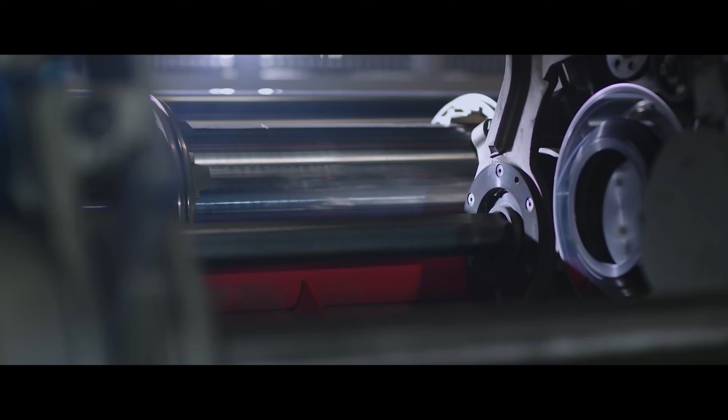Invention and creation stem from breaking boundaries. Every idea that breaks boundaries is the rejection of the status quo, the exploration of possibilities. After entering the Asian market, we kept exploring and pushing limits. Visited more than 10 countries, including China, India, and Indonesia, a journey to unfold the potential of technology.

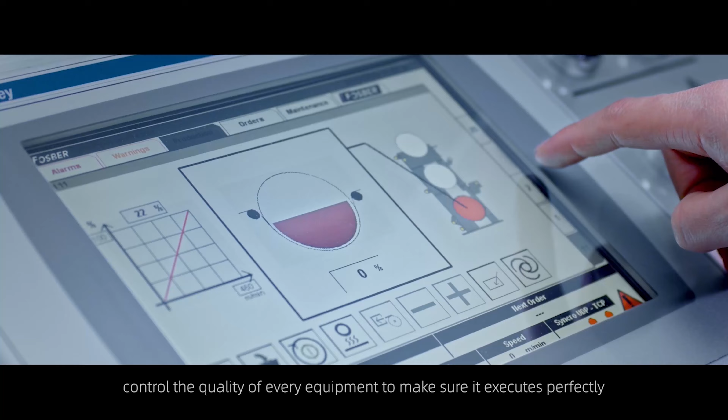This is just the beginning. We, combined with the joint efforts of our outstanding partners from around the world, united the world's greatest talents in our assembly workshop. Control the quality of every equipment to make sure it executes perfectly. Inherited from a long-standing tradition of Italian craftsmanship. Live to let our customers experience the vision of FOSBER's innovation beyond boundaries.

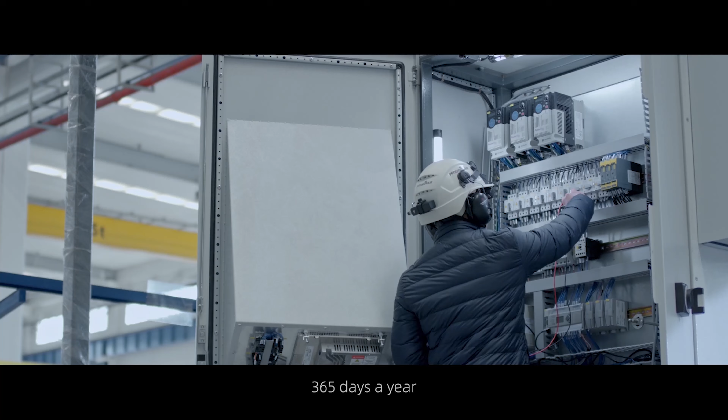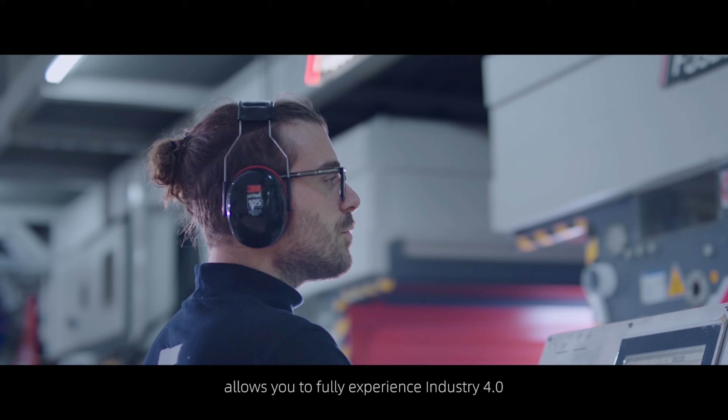24 hours a day, 365 days a year. We provide you with a comprehensive and seamless after-sales service. Incorporate innovation into production. The pioneering intelligent control system offers diagnosis services as a family doctor to your devices, with early warnings and punctual troubleshooting. Allows you to fully experience Industry 4.0.

Together, let us dive into the future. Break boundaries, push limits. What you see now is only a glimpse of the new wave of innovation. Everything we do, we do it for you.

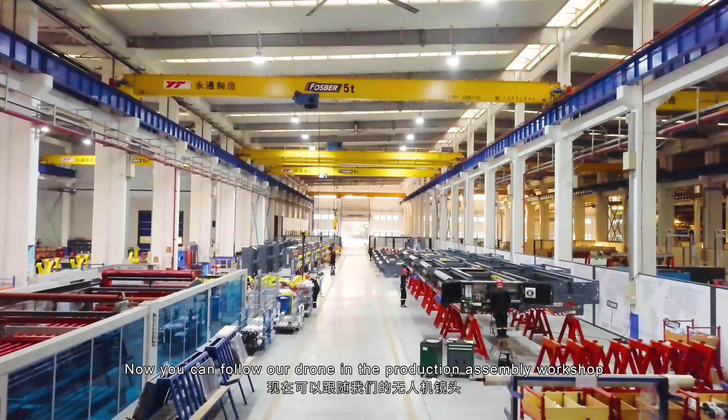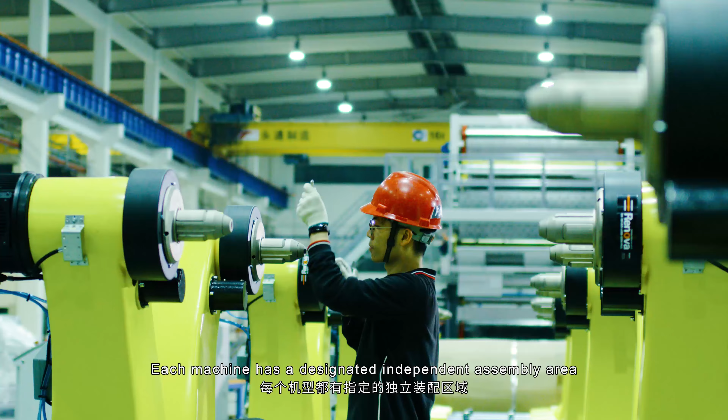Now, you can follow our drone in the production assembly workshop and QC warehouse workshop, which covers the largest area in the entire factory. The assembly workshop is about 12,000 square meters, divided into two sections, the electrical assembly area and mechanical assembly area. Each machine has a designated independent assembly area, and the independent management of each area also closely cooperates.

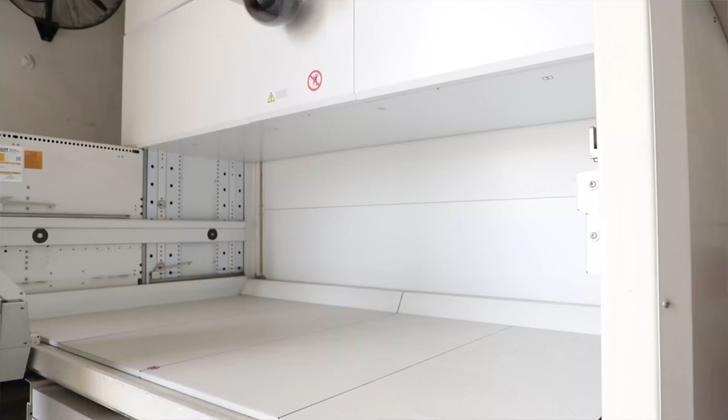The quality control storage workshop is divided into two areas. One is the quality inspection area and the other is the storage area, together covering about 3,000 square meters. Each spare part must be checked by the quality inspection area before it can be used in the storage. In addition, the storage workshop is also equipped with a separate vertical three-dimensional warehouse, which is used for small part storage.

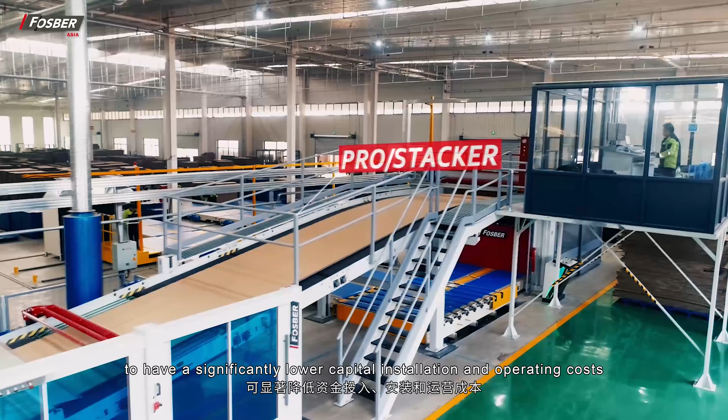In order to meet the specific needs of the Asian market, FOSBER has developed the brand new Pro line, a complete corrugator 100% built, managed and serviced by FOSBER Asia. The Pro line has been specifically designed to have significantly lower capital, installation and operating costs, and it comes in two versions, 250 and 300 meters per minute, and in different working widths from 2.2 meters to 2.8 meters.

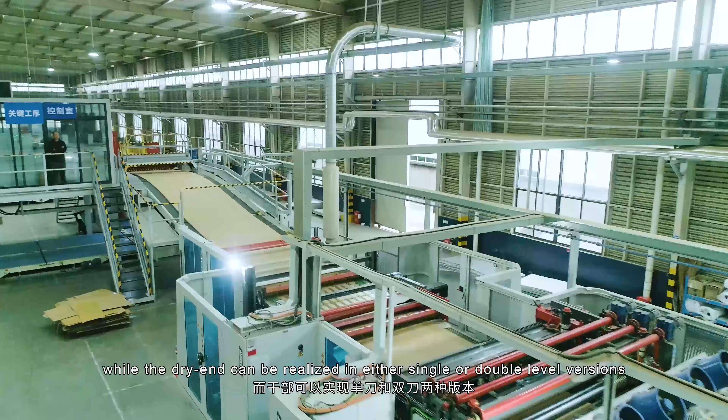According to customers' requests, this line can be configured to produce single, double, or triple flute cardboards, while the dry end can be realized in either single or double level versions. Without any compromise on build quality, the Pro line has been designed utilizing top-level international commercial components, and it is totally aligned to all the new safety standards, adopting the latest safety devices and systems.

The Pro line inherits much of FOSBER's most successful innovations, such as short order capability, no gap order change system, and dry and oil-free technology, making it the ideal solution for those plants that require top-level quality in terms of equipment, efficiency, and the board produced.

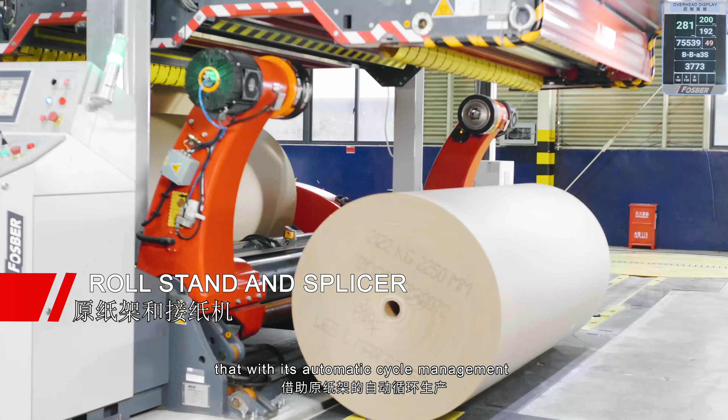But let's begin our tour along the corrugator line, briefly explaining how the corrugated board is made. First, the paper reels have to be unwound in order to be processed by our corrugator. The reel is loaded and unwound by our stand M2 that, with its automatic cycle management, centers the chucks into the core of the reel, automatically lifts it into the correct position, and then discharges the roll once exhausted. The operator has only to supervise the various sequences and allow them to start.

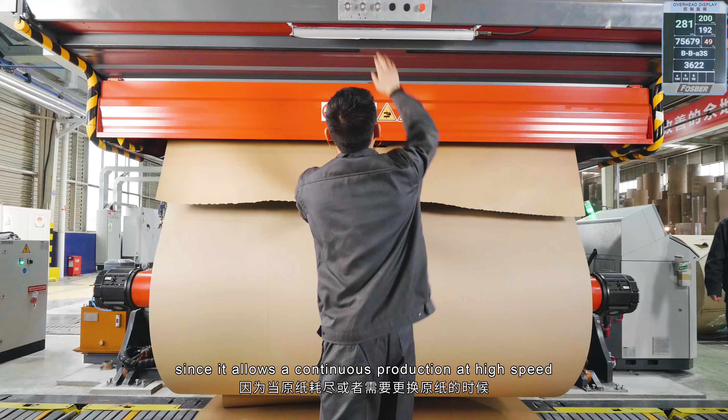Additionally, in order to change the reels without interrupting the production, automatic splicers are installed along the corrugator line. These machines are crucial for the overall efficiency of the line, since they allow continuous production at high speeds without stopping the line every time that the reel is finished or needs to be changed. Safety and simplicity of operation are fundamental.

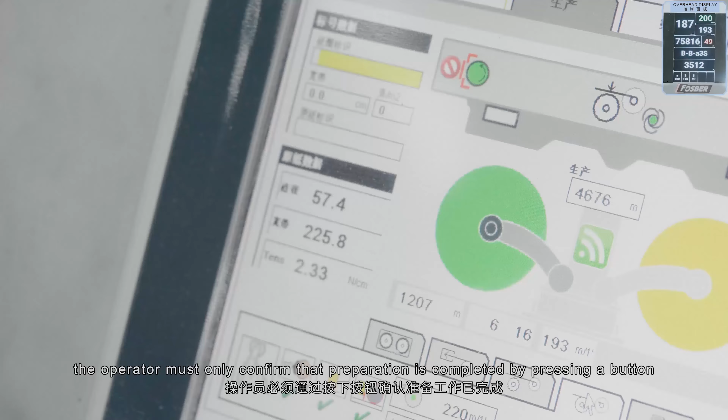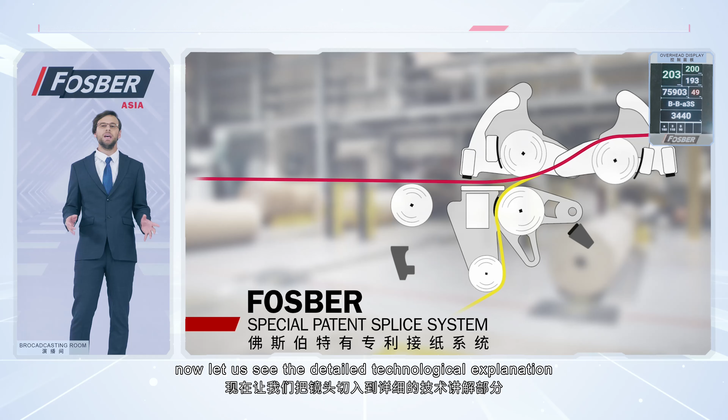In our link splicers, a double splice preparation system makes it possible to work in greater safety during the tape application phase. Once the tape is applied, the operator must only confirm that preparation is completed by pressing a button. Once prepared, the splice is automatically moved into its correct position with no human error possible. Moreover, the link splicer offers cutting-edge technology patented by FOSBER that completes the splicing cycle in only 2 movements with high precision and reliability. Now let's see the detailed technological explanation.

In the special 2-movement splicing system, the first movement blocks the end of the expiring web. The second one simultaneously glues, cuts, and releases the new paper. During the splicing sequence, the expiring web is stopped and a high-pressure, low-impact rotating nip is created, while simultaneously the expiring web is severed and the paper on the waiting roll is released.

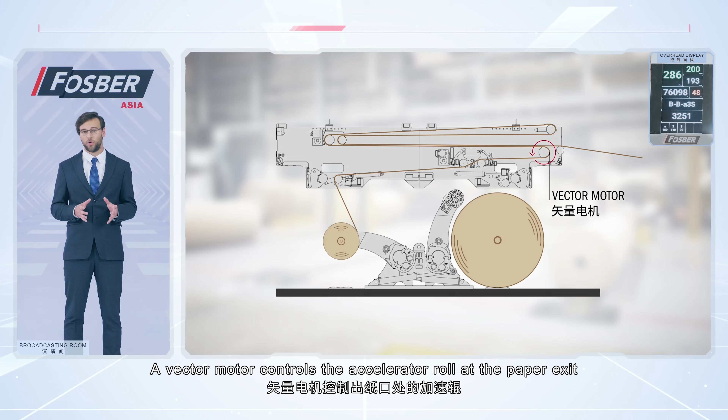This braking and splicing action bonds the leading edge of the new web to the expiring web with extreme precision and reliability. A vector motor controls the accelerator roll at the paper exit, which slows down the expiring paper and accelerates that of the new roll, quickly speeding it up to line speed. During the entire splicing cycle, the accelerator roll is perfectly tuned to the dancing roller, allowing accurate control and perfect paper tension based on the line speed.

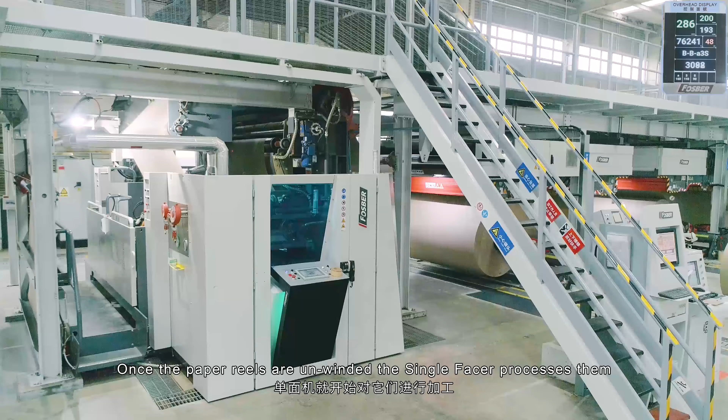Once the paper reels are unwound, the single facer processes them. This is surely one of the most important machines in the line. It starts the creation of the corrugated board, gluing two plies together and creating the typical wave and the flute of the corrugated board. The perfect combination between pressure, temperature, and glue determines the quality and resistance of the board and therefore of the boxes.

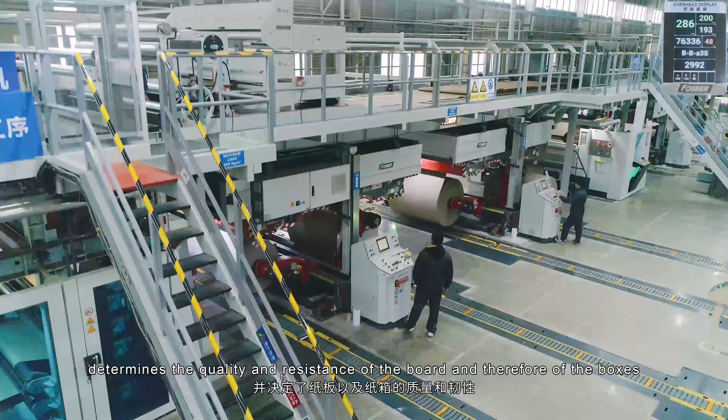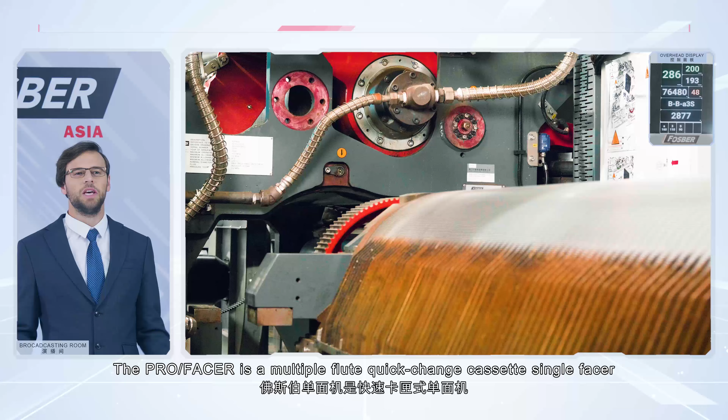FOSBER Pro Facer has been designed in order to produce at speeds of 300 meters per minute, obtaining the maximum physical characteristics of the board with the widest range of paper, from the heaviest to the lightest, and always controlling the energy, steam, and glue consumption. The Pro Facer is a multiple flute quick change cassette single facer.

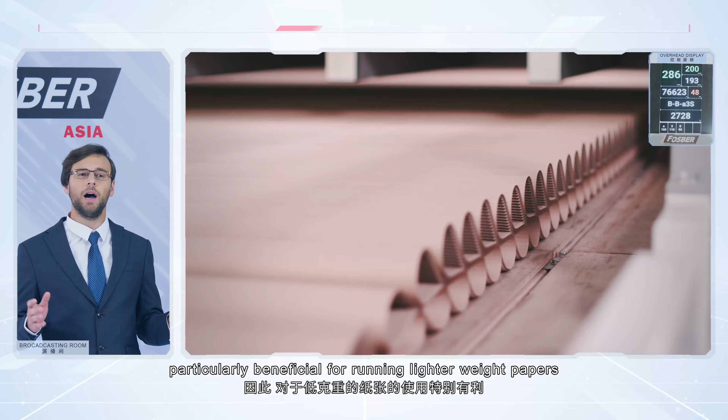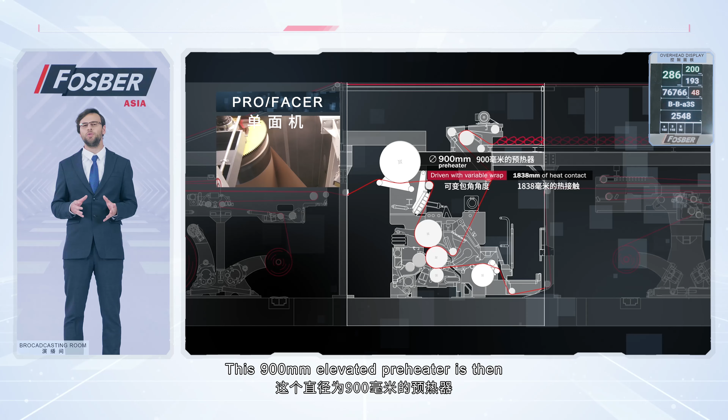On the liner side, the Pro Facer is fitted with a 900mm elevated preheater driven at line speed with variable wrap. For maximum thermal efficiency, this is located on the machine itself and provides up to 1,838mm of heat contact on the liner opposite to the glue side. This 900mm elevated preheater is then immediately followed by an integrated curved preheater, which provides a further 560mm of heat contact when required on the opposite side of the paper with on-off contact functionality.

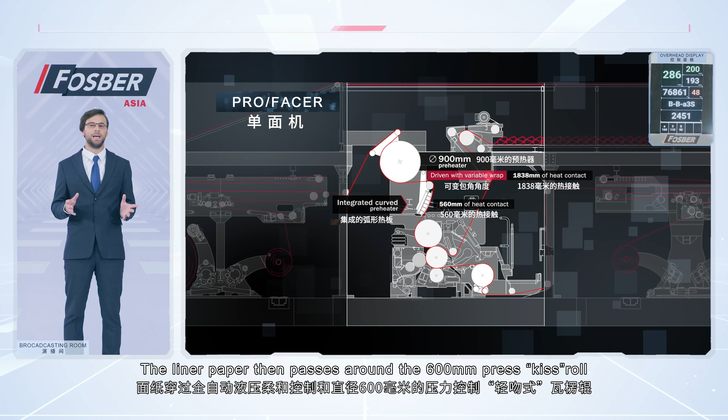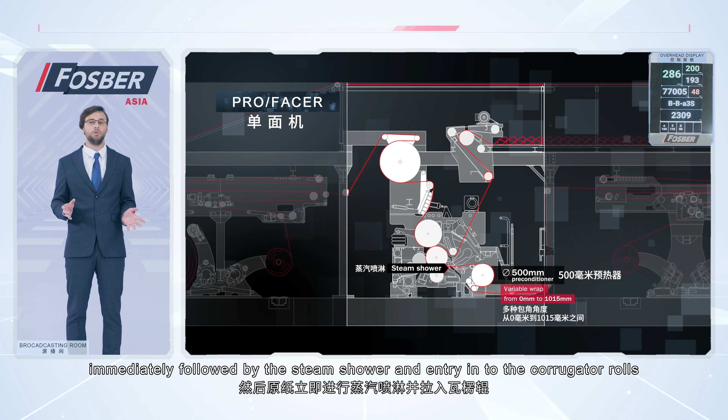The liner paper then passes around the 600mm press kiss roll with its fully automatic hydraulic soft touch control, from which point the liner is then held in contact with the fluting on the upper corrugator roll right up to the extended nip roll. On the fluting side, a 500mm preconditioner with variable wrap provides from 0 to 1015mm of heat contact with the paper, immediately followed by the steam shower and entry into the corrugator rolls.

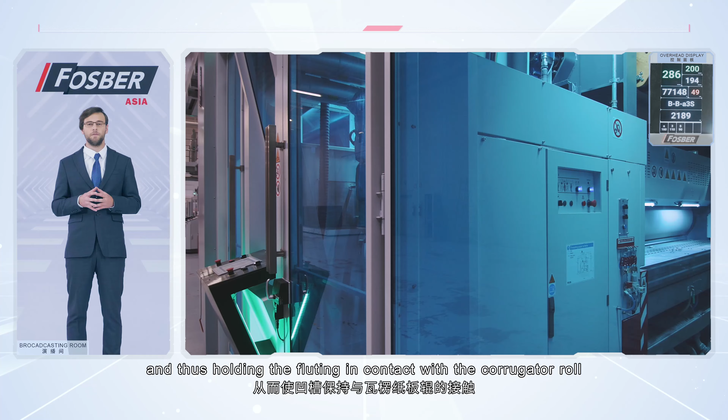A revolutionary new negative pressure design ensures that the liner and fluting are perfectly held in constant and uniform contact across the full web width during the bonding process. The slim compact hood comes into sealed contact with the upper corrugator roll during production, sucking the air out of the slots and thus holding the fluting in contact with the corrugator roll.

Unlike conventional vacuum systems, this design does not require expensive vacuum-drilled corrugator rolls, which have the disadvantages of getting dirty and losing their effect or causing wraparounds. And there is no need for large, oversized suction motors, but only a small fan motor.

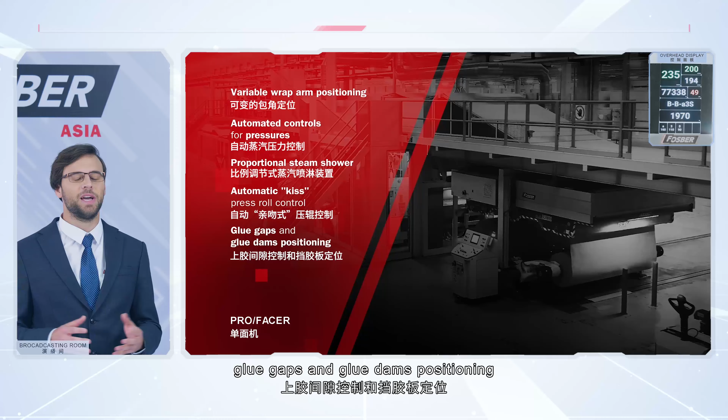The PRO/FACER single facer hosts a series of fully automatic local process controls, such as variable wrap arm positioning according to the actual paper temperatures, as well as automatic controls for steam pressures, corrugating roll pressures, proportional steam shower, automatic kiss press control, glue gaps, and glue dams positioning. The onboard steam system is supplied by Baviera, Europe's leading steam specialist.

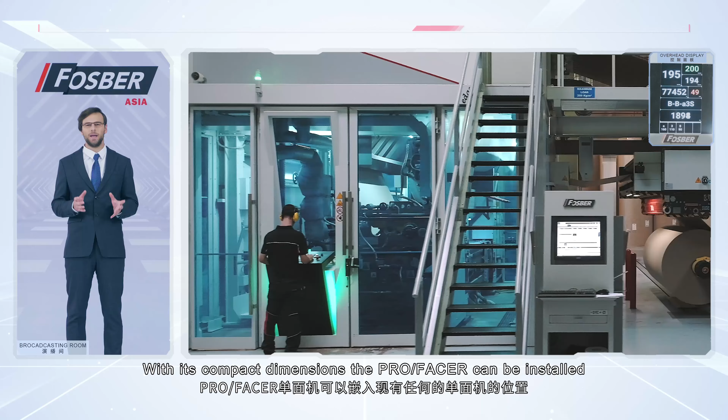Flute cassette change can be carried out in a matter of minutes, utilizing the motorized cart or by an automated transfer car configuration fitted to the drive side of the machine. With its compact dimensions, the PRO/FACER can be installed in the space of any existing single facer.

After the single face web has been formed in the previous sections, it is prepared for gluing to the outer liner. The single face web passes through a multiple preheater first, then starch is applied to the tips of the flutes in a glue unit, and eventually the outer liner is bonded to the single face web to form the corrugated board. Finally, all the sheets are pressed together and dried in the machine called double backer to form the final continuous corrugated board web.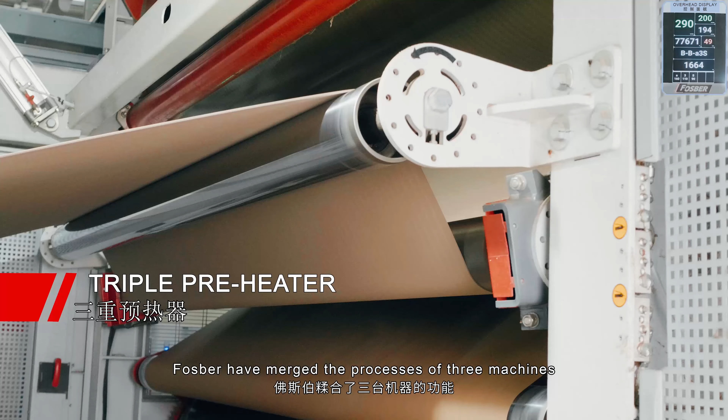The Pro line has a simpler and more economical gluing process. FOSBER have merged the processes of 3 machines. The triple preheater, the glue unit, and double backer are embodied into a single group machine zone named the Pro Backer. Pro Backer manages the entire bonding process from a single operator PLC and touchscreen control station.

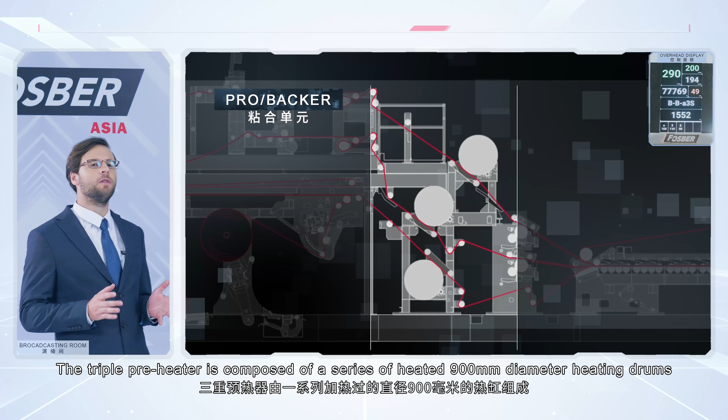The triple preheater is composed of a series of heated 900mm diameter heating drums driven at line speed for maximum thermal efficiency. The preheater drums are fitted with variable wrap arms, all with 0 wrap capability. The wrap arms are positioned automatically either according to the actual running speed or by paper temperature control.

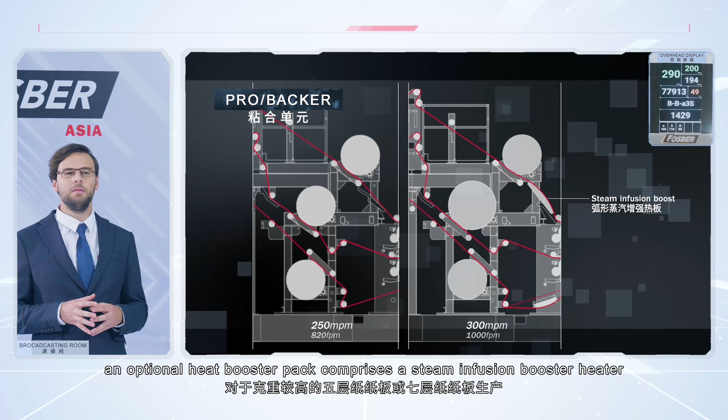For heavier double or triple wall production, an optional heat booster pack comprises a steam infusion booster heater on the upper single face level, a wider 1100mm diameter central heating drum, and curved booster hot plate on the bottom liner at the entry to the glue unit.

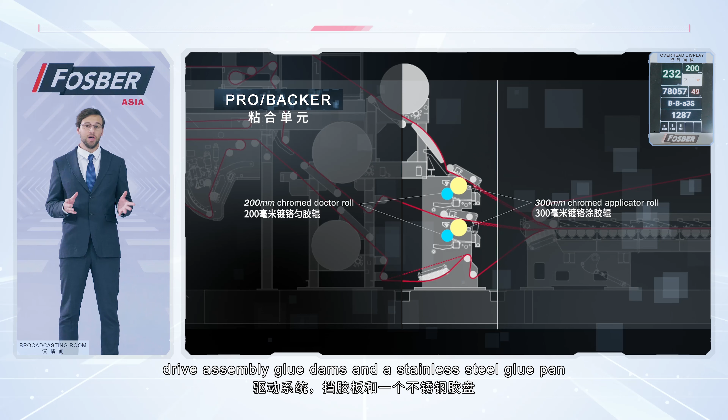Each glue level consists of a 200mm chromed doctor roll with adjustable scraper blades, a 300mm chromed applicator roll, drive assembly, glue dams, and a stainless steel glue pan. Each level has independent settings and is fitted with automatic glue dam positioning. The glue gap between doctor roll to applicator is automatically set from a minimum of 0.05mm to a maximum of 0.6mm.

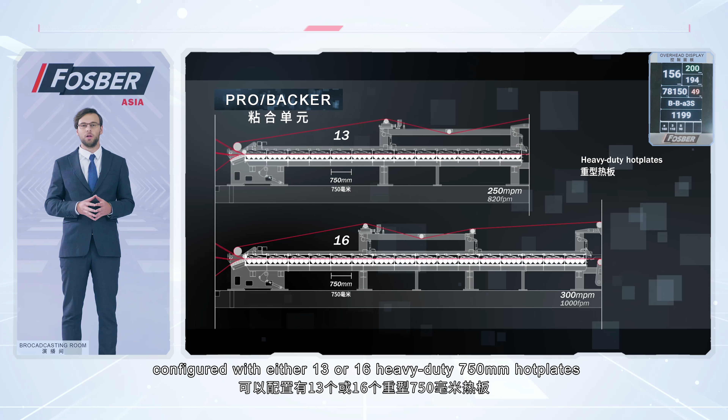Depending on requirements, the Pro Backer double backer is configured with either 13 or 16 heavy-duty 750mm hot plates, providing 9.75 meters or 12 meters length of heating section respectively, plus an additional curved hot plate for the bottom liner as it enters the machine.

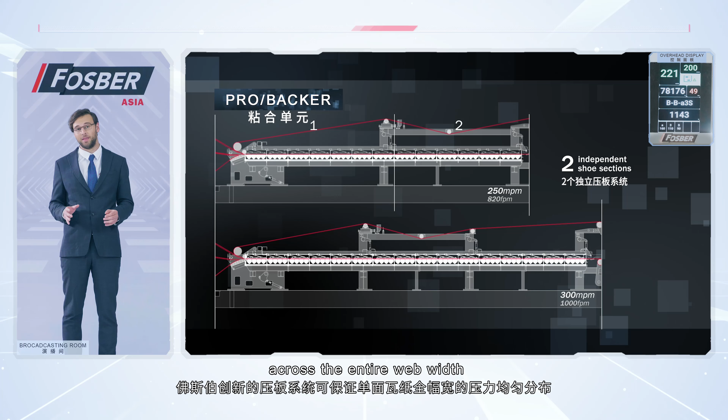FOSBER's innovative shoe system guarantees uniform pressure across the entire web width. Furthermore, the system automatically senses the web width and reduces the pressure at its extremities to prevent edge crush. A further pressure section consisting of 4 shoes is fitted on the cold traction section of the double backer. The head pulley is driven by an energy-efficient AC drive and motor.

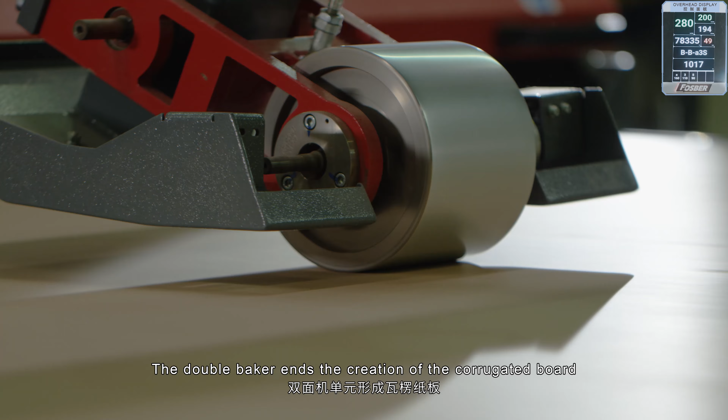The double backer ends the creation of the corrugated board, but the continuous corrugated board web then has to be properly cut, longitudinally and transversely, to obtain the final box's dimensions. Here starts the dry end section of the line. At the dry end, the rotary shear, slitter scorer, and cut-off knife have again been merged into a singular group machine zone called the Pro Cutter.

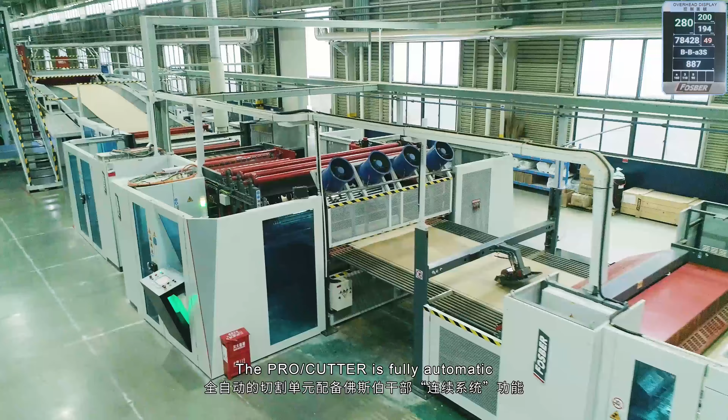The Pro Cutter is fully automatic and is equipped with all of the same features and functions established with FOSBER's renowned continuous system dry end technologies. Such features include gapless order change, oil-free slitting, and cutting technology across the full dry end, plus an even shorter order run capability.

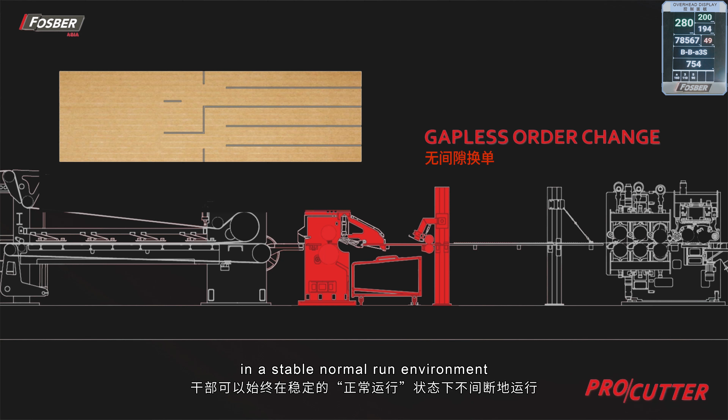With the gapless order change feature, the dry end is effectively able to continuously run in a stable, normal run environment at all times without ever severing the web. Lead edges of the new order are totally eliminated along with the associated risk of jam-up. There are no more accelerated and uncontrolled tailouts of the expiring order, and so dry end waste is dramatically reduced. The Pro Cutter is available in single or double level configuration.

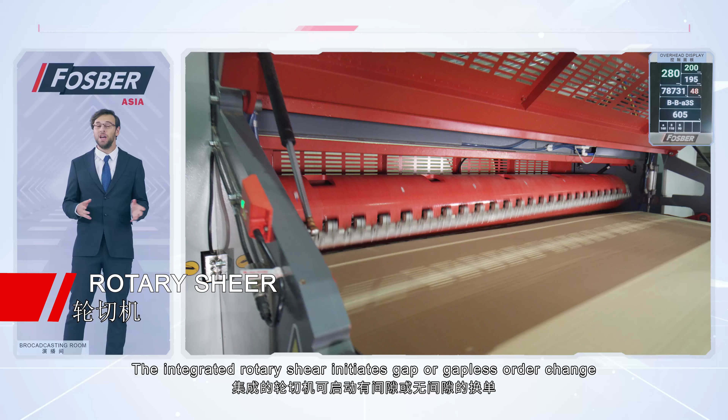The integrated rotary shear initiates gap or gapless order change, as well as carrying out the continuous cut to waste function when required. The slitter scorer is a tandem unit with 2 independent scoring stations and 2 independent slitting stations with plunge-type order change, which allows the machine to instantaneously change order in gapless or even gap mode.

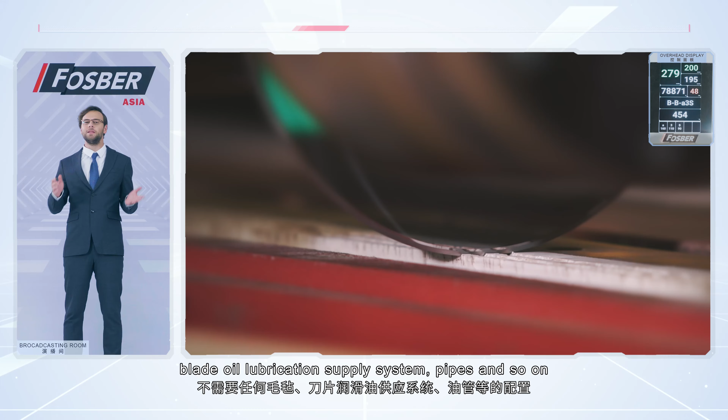The blades cut against a fixed steel contact bar which houses the Teflon block anvil strips, totally eliminating the need for any felt blade oil lubrication supply system, pipes, and so on. It also means the machine stays much cleaner.

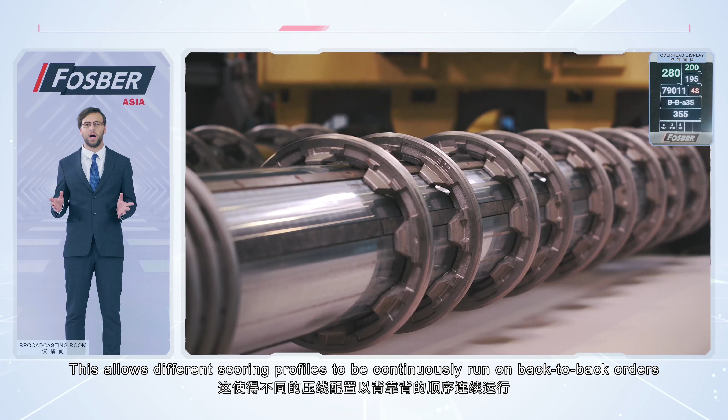The 2 scoring shafts are equipped with multiple scoring profiles, with up to 22 scoring heads fitted on each scoring shaft. This allows different scoring profiles to be continuously run on back-to-back orders. Minimum score-to-score distance on the same shaft is just 40 millimeters. And for orders requiring less than this, the 2 main score shafts are either run in tandem mode or a third automatic auxiliary shaft can be integrated into the machine, providing even greater multiple profile scoring flexibility.

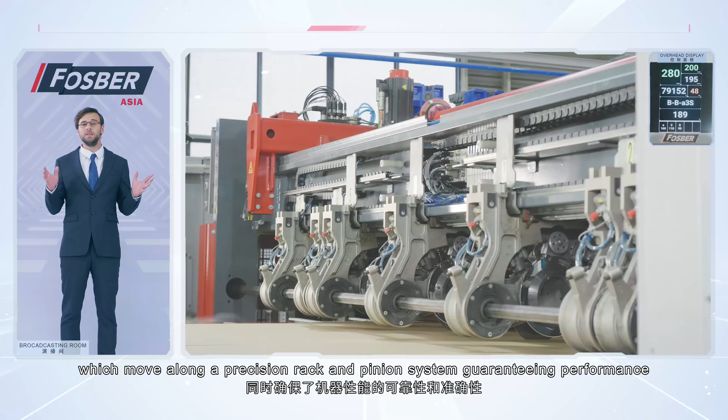Fast and precise positioning of the tools for the next order is accomplished via 5 independent robots, which move along a precision rack and pinion system, guaranteeing performance, reliability, and total accuracy. The cutoff knife incorporates FOSBER's patented hydrostatic bearing knife bars. This new design drastically decreases the need for blade tuning and sharply increases blade life, again, without the need for any lubrication.

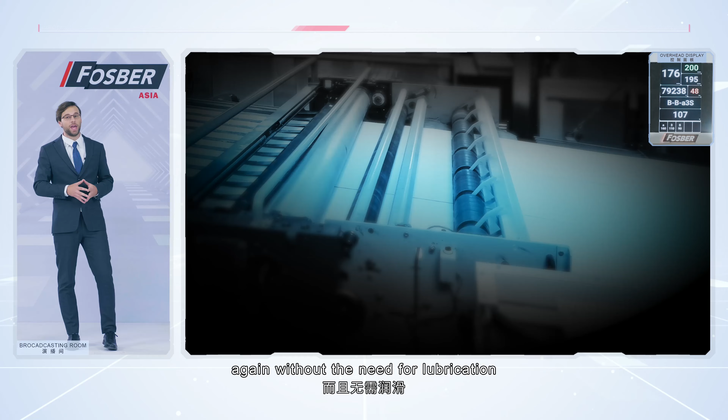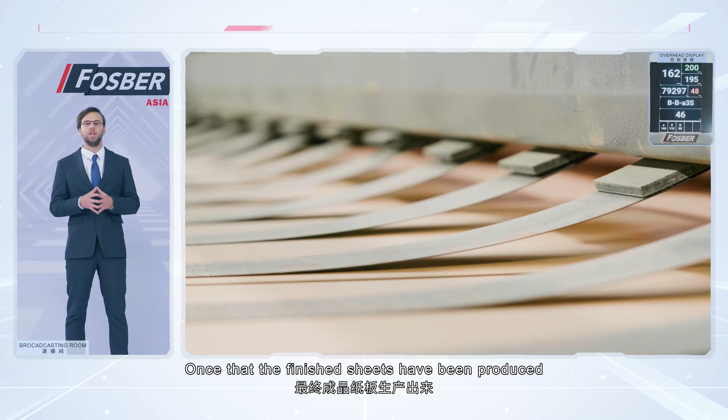The outfeed system can be fitted with a sheet diverter system on each knife level to automatically eject order change sheets and all splices, while constantly maintaining a continuous unbroken flow of web through the dry end at all times and at full line speeds. Once the finished sheets have been produced, they have to be properly stacked in order to be easily transported and managed to the following stations inside the plant.

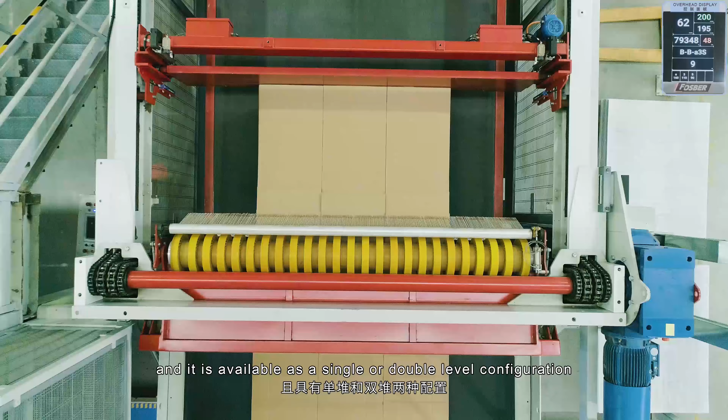The FOSBER Pro Stacker is fully automatic and it is available as a single or double level configuration. As sheets exit the cutoff knife, they are delivered onto the stacker's braking section, where they are shingled and perfectly aligned. The shingling brushes are automatically and individually controlled according to the sheet dimension, board type, and actual running speed.

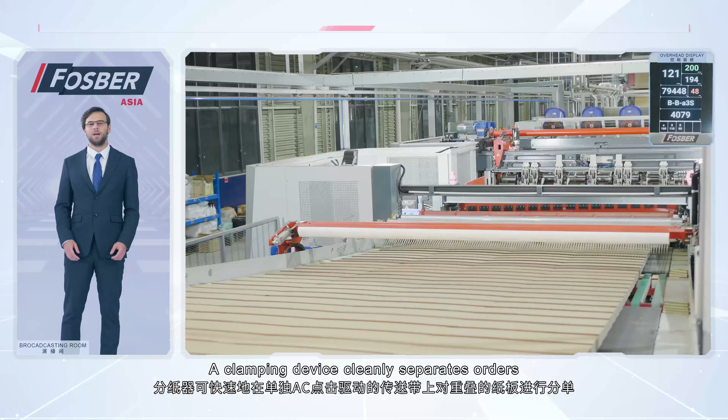A clamping device cleanly separates orders and stacks as the shingled sheets move along a series of individual AC-driven belt conveyors, which have dual V guides to prevent any lateral movement of the belts. The backstop on the stacker platform is automatically positioned at order change.

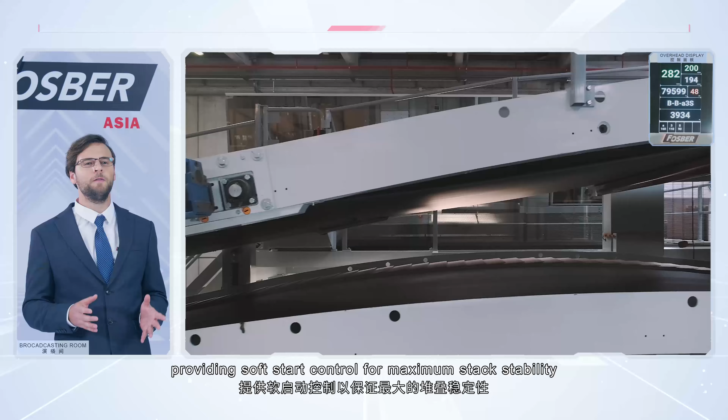The stacker platform consists of a full-width belt conveyor system with AC drive technology, providing soft start control for maximum stack stability. The stacking platform is driven up and down with sheet-by-sheet descent control during stacking via an AC drive and motor, utilizing a dual chain design and a counterweight arrangement to increase both energy efficiency and platform cycle speed.

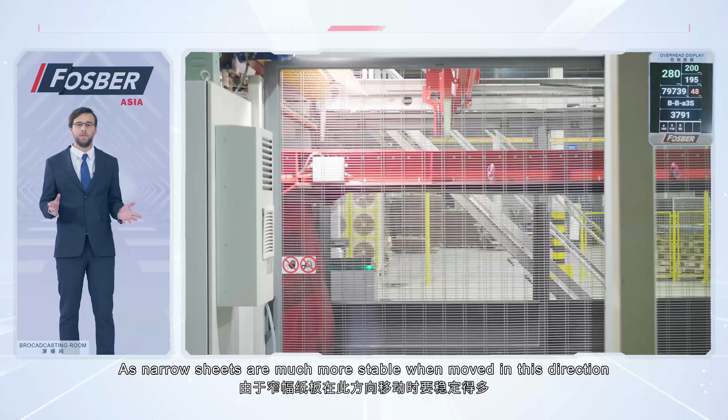The Pro Stacker has a unique inline reverse discharge system where the stacks are expelled from the platform backwards in the sheet length direction. As narrow sheets are much more stable when moved in this direction, the stacks can be discharged from the stacker platform at a much faster speed. For shorter length sheets, it reduces the distance the stack has to travel to clear the platform, and so minimizes the wait time before the stacker deck can start its ascent. The result is faster cycle time and greater stack stability, especially on the smaller formats.

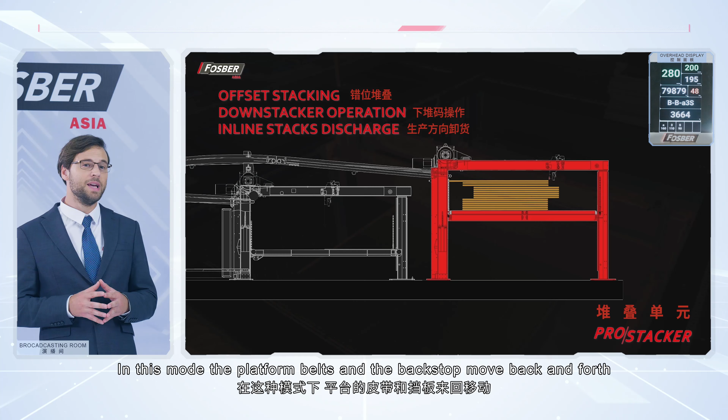A very useful function of the Pro Stacker is the possibility of performing offset stacking. In this mode, the platform belts and the backstop move back and forth in order to split the stack into several bundles, to get them easily grouped and manageable for the operators.

The coordination between the various functions of the corrugator and its supervision, the control and recording of the working parameters are key factors in the production process. All these features are performed by the brain of the corrugator, the Pro Synchro.

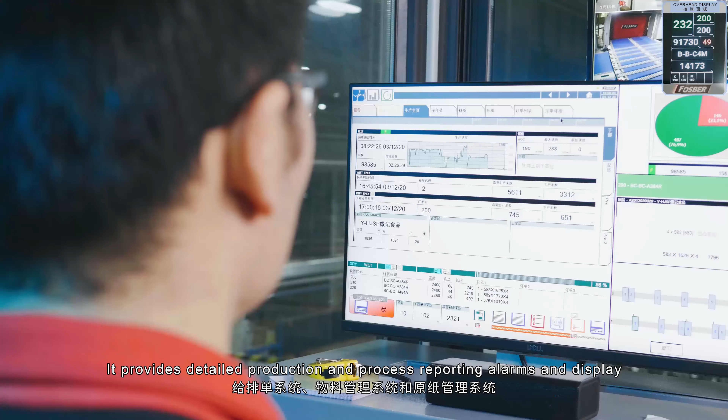The Pro Synchro Corrugator Control manages, synchronizes, and controls the complete corrugator line from a single position. It provides detailed production and process reporting, alarms and display, intelligent diagnostics, and full data link to the scheduling system, material handling, and roll stock management systems.

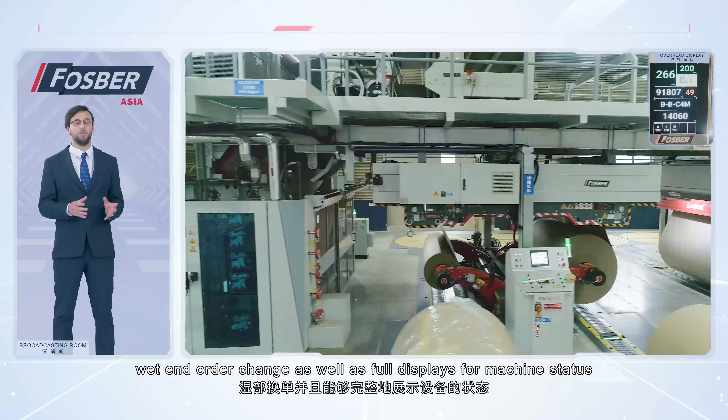Automatic wet end features of Pro Synchro include bridge management and calibration, synchronization of speed and splices, partial reel label printing, roll stock management interface, roll stand monitoring, paper break detection, wet end order change, as well as full displays for machine status, alarms, and diagnostics.

FOSBER's Pro Synchro Dry End Control Supervisor provides detailed production reporting, intelligent diagnostics, pallet label printouts, and data links to the wet end, office, and scheduling networks, and materials handling control systems.

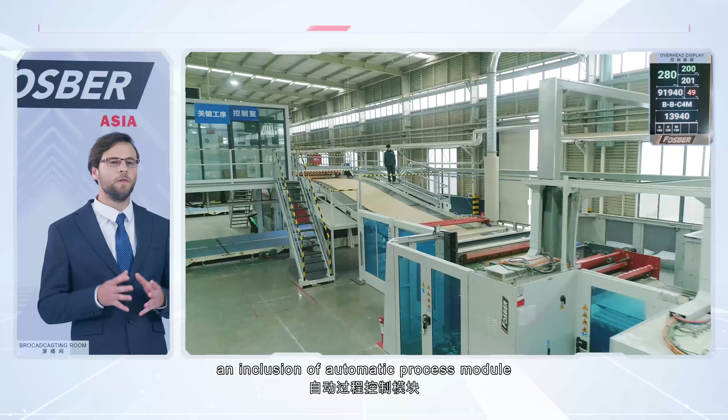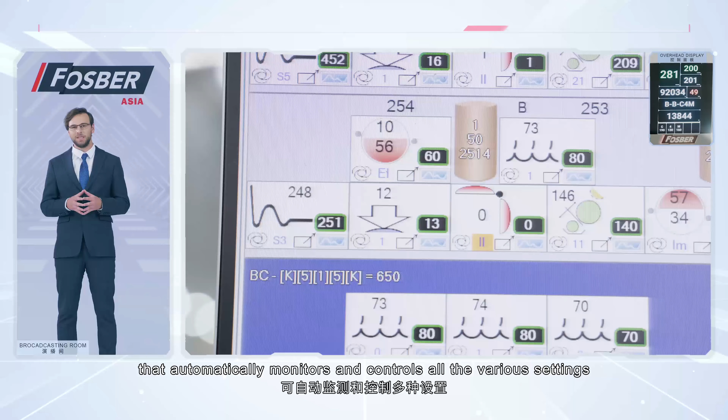To standardize and monitor the production process, an automatic process module has been included in the Pro Synchro Corrugator Control. The Proactive module enables automatic preemptive machine adjustments to maintain the desired board quality. Proactive is a closed-loop control system that automatically monitors and controls all the various settings and variables of the corrugating process, reducing waste by ensuring a proper bond and optimum quality flat board is produced.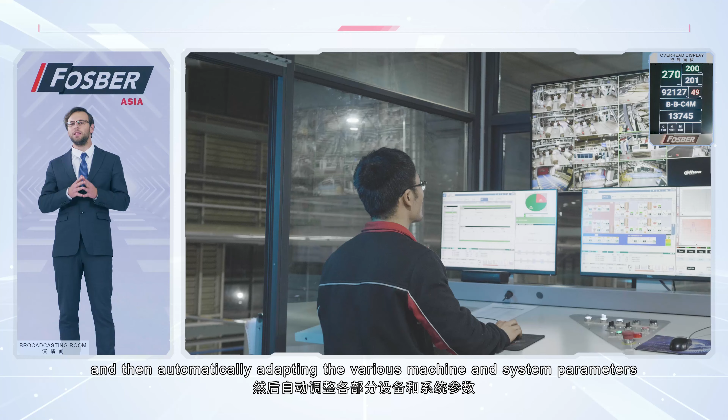This is achieved by measuring and monitoring temperatures and moisture levels at strategic positions along the corrugator line, and then automatically adapting the various machine and system parameters to ensure that the ideal target process settings that have been set and personalized for each individual board type quality the plant produces are met.

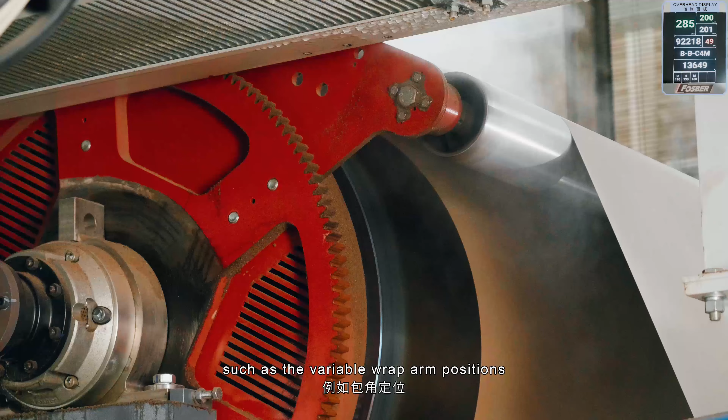The Proactive will therefore continuously set and adjust all such settings, such as the variable wrap arm positions, steam pressures along the corrugator, steam showers, all glue gaps, double backer steam shoe pressure settings, as well as the paper tensions in the splicers and at the bridge brake. The closed-loop control system also allows instant automatic correction of any warp detected, either by the operator or automatically by a laser bank, in either machine or cross-machine direction.

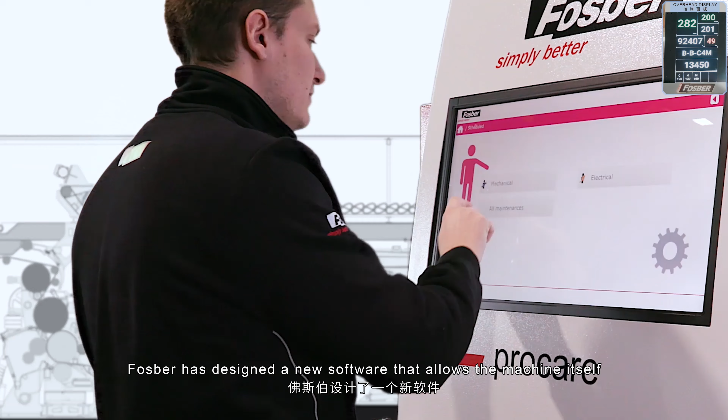One of the most vital aspects of the production process is, of course, that of maintenance. To remove the total reliance of this feature of the corrugator on people, FOSBER has designed a new software that allows the machine itself to dictate exactly which services need to be carried out to maintain the total reliability of the line.

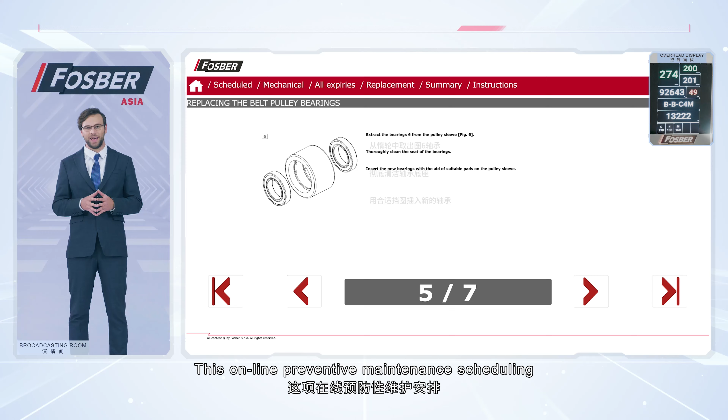The ProCare Suite is an advanced tool that provides great operational support to the plant's management, improving both the line efficiency and the troubleshooting procedures. The built-in automation assists maintenance personnel with proactive instructions and illustrations on when and how routine maintenance procedures need to be carried out. This online preventive maintenance scheduling is based on actual live data collected by the Pro Synchro Corrugator Control and not by general fixed parameters.

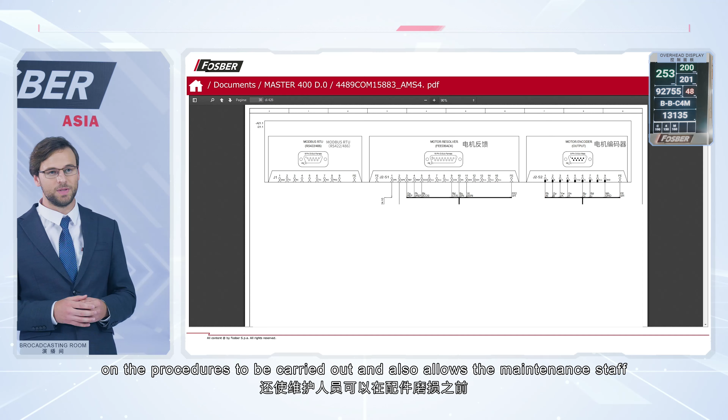The system provides detailed instructions with a wide range of photos, videos, and supporting documentation on the procedures to be carried out, and also allows the maintenance staff to easily identify and order the required spare parts from FOSBER before such components wear out. So, this is all the sharing today.